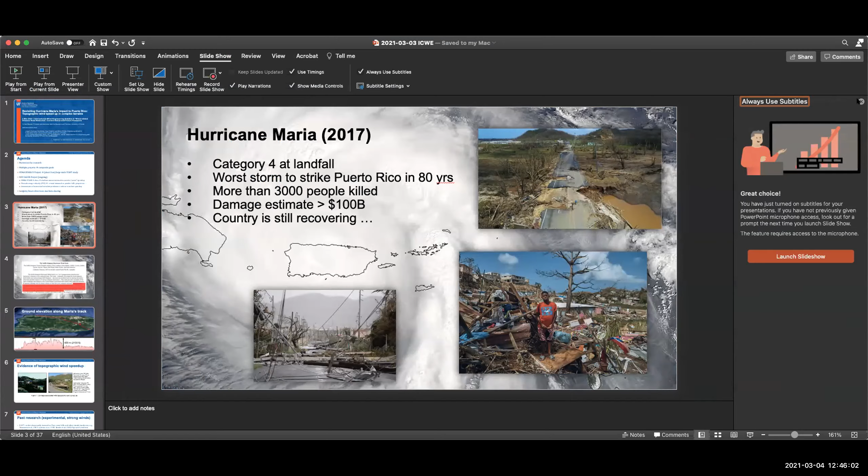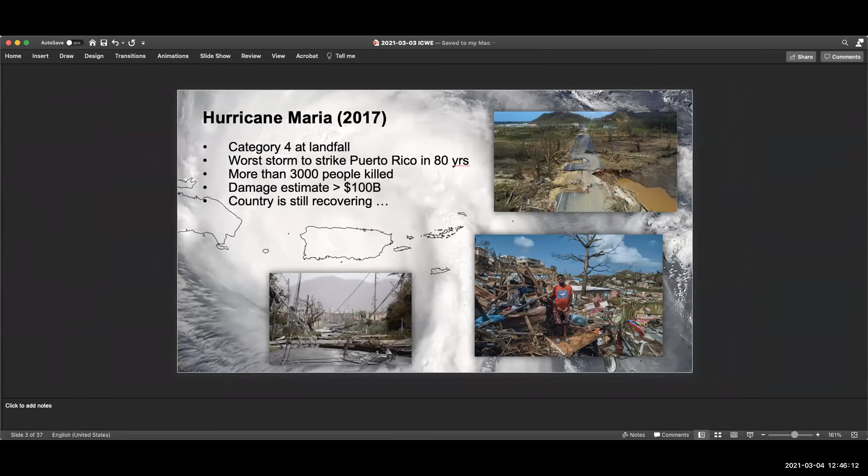The first of the two short presentations is given by Professor Forrest Masters, who's a professor in the Engineering School of Sustainable Infrastructure and Environment, and serves as Associate Dean for Research and Facilities in the College of Engineering. He gained his PhD in Civil Engineering, Structural Engineering from the University of Florida in 2004, and has received support from more than 50 grants from state, federal and private sources, including the NSF Career and MRI programs. He leads one of seven natural hazards engineering research infrastructure facilities for the NSF to study the damaging effects of extreme winds on civil infrastructure. He's published more than 100 papers in peer-reviewed journals and conference proceedings, and has given more than 100 invited presentations. He serves on the board of the Federal Alliance for Safe Homes and recently served on the NIST National Advisory Committee on Windstorm Impact Reduction. In 2014, Dr. Masters was awarded the Junior International Association of Wind Engineering Award, the highest award in his field recognizing significant and original contributions to research by an individual under the age of 40. He was also honored with the Outstanding Achievement Award in Mitigation at the National Hurricane Conference.

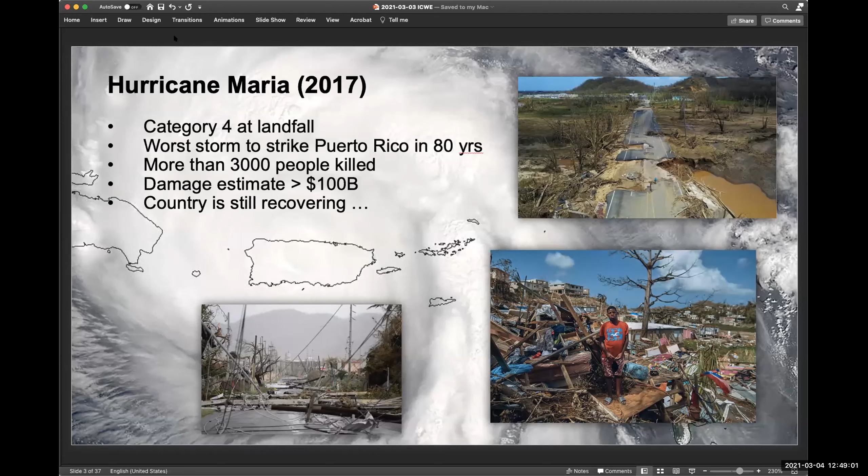With regards to Hurricane Maria, it was truly catastrophic—a Category 4 storm at landfall. It was the worst storm in 80 years for the country. Over 3,000 people were killed directly from the event, but subsequent studies have shown a lot more people died because of indirect causes. Damage estimates were over 100 billion, and truly the country is still recovering. It was an absolute tragedy.

Puerto Rico is located basically at the boundary of two tectonic plates, and you have a pretty large region of mountains that runs through the middle of the island. So it makes for some interesting terrain.

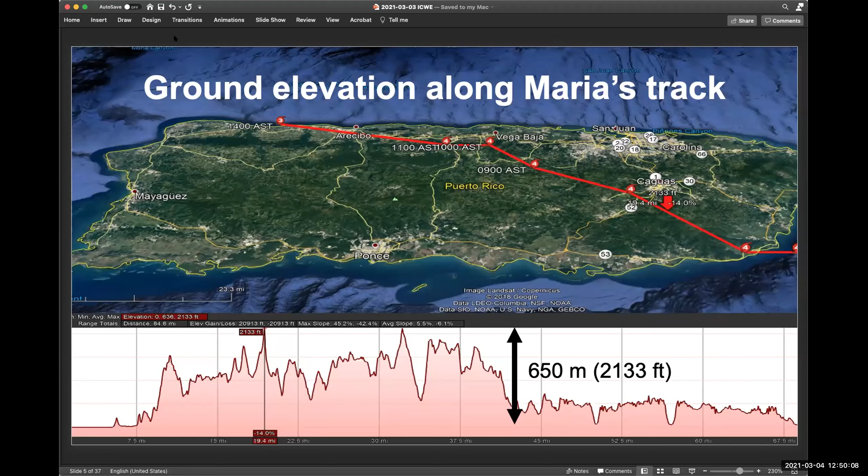We know that wind speed-ups can reach a value of 2, looking at flow upwind of the transition up the slope to the top of the hill or the mountain.

Well, what's really interesting is if you look at this literature, which has been going on for decades. There have been high quality projects occurring since the 40s and 50s even on this, but a lot of them focused on simple landforms. Probably many of you are familiar with the Askervein project and others that have taken place over the years.

I'm not going to get into field experimentation today, but in addition to the experimental work done in the laboratory, quite a few projects, even some done recently in Portugal and other places, go in and quantify the fluxes and surface behavior, looking at canopy flows, kind of the whole 9 yards, and that's informed our understanding of modeling.

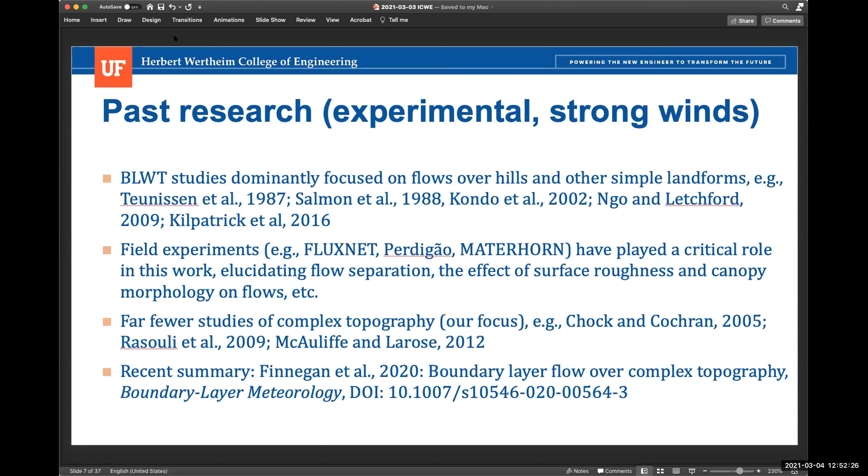So as a result, when the FEMA mitigation assessment teams finished up and produced their conclusions, it was determined there needed to be a special wind map generated for Puerto Rico, a special wind region map, just like what had been done following Iniki in Hawaii in that area. This is sometimes referred to as microzonation, but basically a special wind map.

So rather than looking up, say, Kzt in ASCE 7, you can work directly off the map to pull wind speeds. FEMA and its contractors, through a program called STARR II, which involves a couple different engineering firms including Atkins, worked with Applied Research Associates with Peter Vickery to develop that map.

And they came to us and asked us to do a project to collect data to validate the modeling, semi-empirical modeling that Peter was doing. And so we got involved.

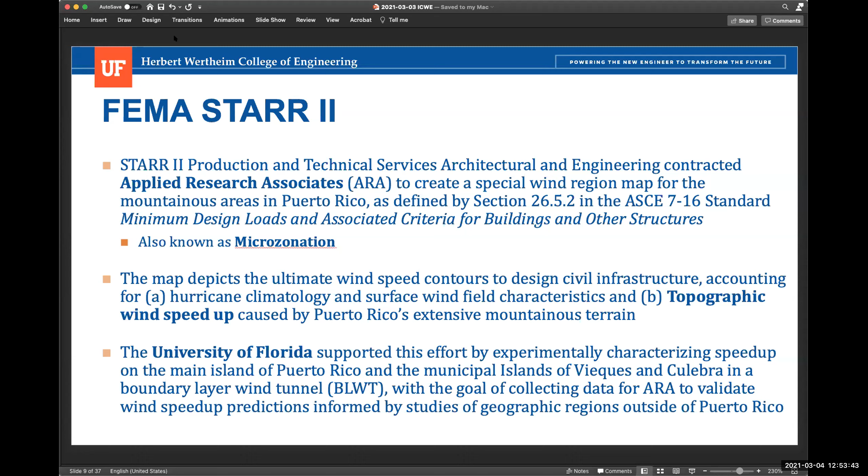It was an interesting project because we didn't have a lot of time. We were not equipped in our lab to do any type of topography work. I think they got a hold of us in May and we had to start by June. We only had, I think, 3 months to do the whole project. As you'll see, it turned out to be, I think, one of the largest topographic studies ever completed.

The project centered on 6 study regions on the main island, basically at the landfall point in the areas, Yabucoa and Humacao regions, and then also inland, very built up areas there in the mountain chains in Utuado and Aibonito, and then also the 2 municipal islands, Culebra and Vieques. So we picked those regions to work in to get some type of representative sampling of the area.

The island's simply too large to put in the wind tunnel. So we ended up working with a 1 to 3,100 scale, which is nominally the size you need to encompass most of Culebra. That's nominally a 12.2 kilometer diameter and a projected state plane coordinate system.

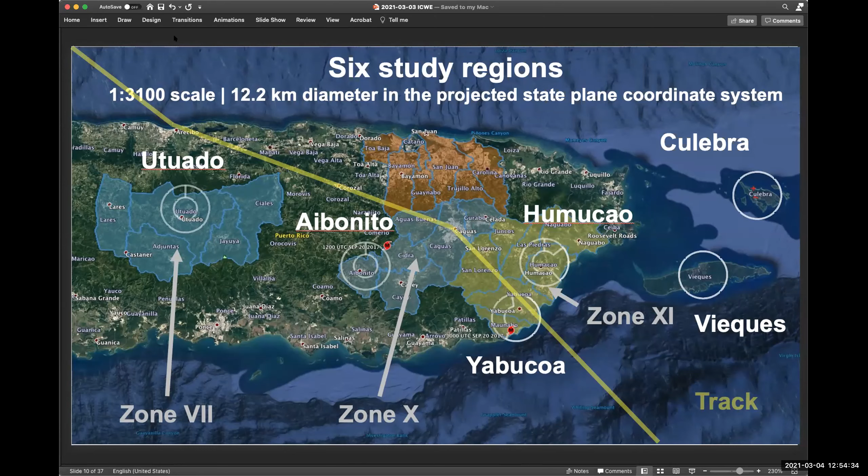So as I mentioned before, this is real terrain, real environment. It looks something like this. Here we're looking inland, I think at Aibonito or maybe Utuado. But you can see our measurement cruciforms where we plan to do data collection, and you can see all the different locations, which in plan form are spread equally, but when you look at it obliquely like this, it does look a little bit funny.

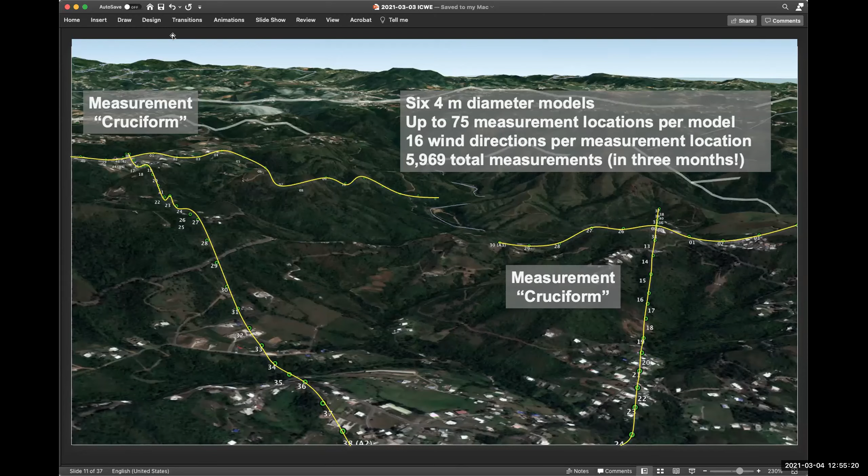So we developed 6 4-meter diameter models. We took up to 75 measurement locations per model and looked at 16 different wind directions at each location. So we took almost 6,000 measurements during the course of this experiment using Cobra probes.

So if you're not familiar with our lab, let me introduce you and I'll walk you a little bit about the experimental setup. This is our facility.

We're located at the Powell Laboratory at the East Campus of the University of Florida. We don't really view our lab as just a physical testing lab. We do a lot of work on the high performance computing system there. It's really a cyber physical testing facility. In fact, that's very important for this project. It's really the linking of these two things that makes the operation work.

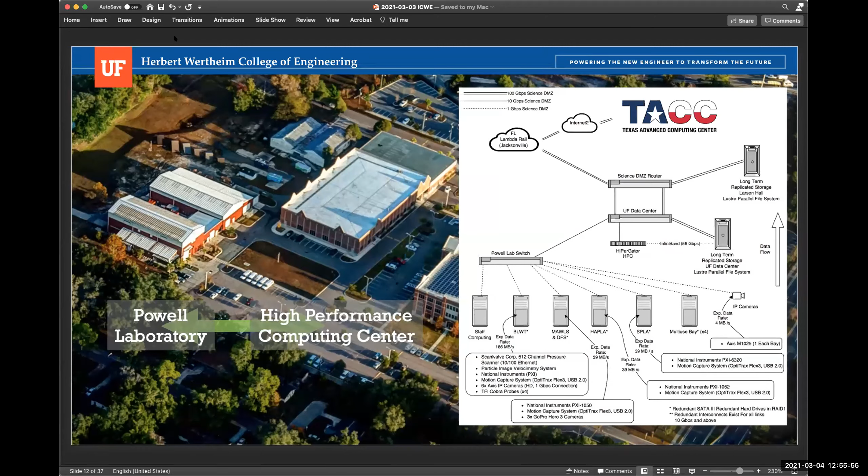We're really just one program, at least in the US, one of many, and I want to tip the hat to those other programs. We work inside a larger program managed by the National Science Foundation, a large facilities program. If you've heard of the Large Hadron Collider, the McMurdo Station in Antarctica, the LIGO facilities that detected gravitational waves, or more recently the Arecibo telescope, which unfortunately was destroyed but is now being rebuilt, it's this program, called the Natural Hazards Engineering Research Infrastructure Program, that's sponsored through this effort.

It's actually a broad collection of different programs. There's a good chance, if you know an academic here, or even practitioners in the US who practice or do research on wind engineering, that they're part of this network in some way. There's quite a bit of industry involvement too. Just to take a second to acknowledge some of those other groups, including Florida International University, which also operates the Wall of Wind as part of that program.

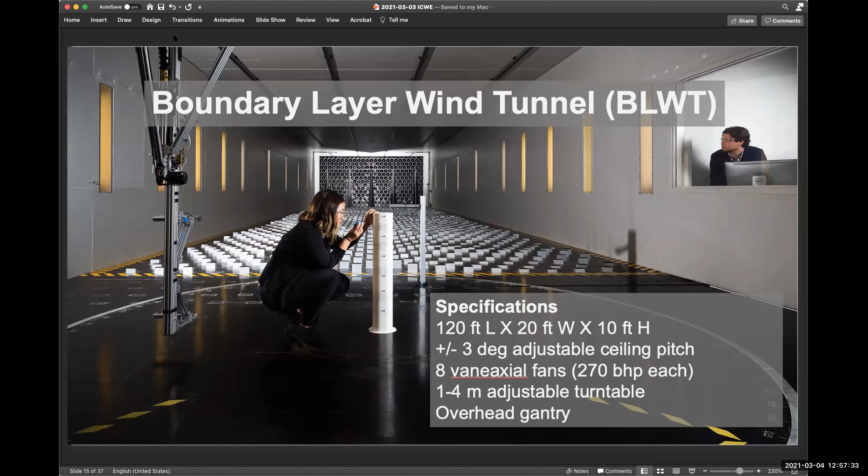Our focus primarily is boundary layer wind tunnel modeling. For those of you who haven't seen our facility, that's a whole presentation unto itself. But we have some unique features with our terraformer system that allows us to individually change elements. We can change the development section out in 90 seconds to any configuration, and it's all been modeled appropriately, so there's no guesswork in terms of choosing a roughness length and a geometric scale. We can directly dial that up, so we get to do lots of high throughput testing in a large tunnel.

I want to immediately point out, as someone who had not done topographic work before, I discovered very quickly I had way more questions, and still have some, about how we do that, and maybe even question whether this is really the future of how we're going to do this type of modeling. One of the biggest challenges is working at these incredibly reduced geometric scales. We went to 1 to 3,100, which was under the limit in the relevant standards and literature of 1 to 5,000.

But if you look at our Reynolds numbers, we had a rough wall boundary layer, as expected. At the end of the day, the mismatch is a factor of 7,000. It's a huge difference between full scale and model scale.

Secondly, because you work at these small scales, when you're trying to take measurements down at the Earth's surface, you're not really measuring in the inertial sublayer or roughness sublayer anymore. You're actually getting into the eddy surface layer. That doesn't really change the mean velocity profile, but it does have an effect on the spectra. As you can see here, the roll off is different. You don't get a 5/3 roll off like you normally would. So that was one thing we discovered.

Working with probes is just a nightmare, to put it in a word. The types of accuracy you have to achieve to do this is incredibly hard. We have a very large turntable, and we're trying to position the probe within a millimeter, but also getting it close to the surface is a challenge. We can only get down to about 8 millimeters before we distort the flow. And there are real consequences—it's easy to break a $10,000 probe moving around—but we did it.

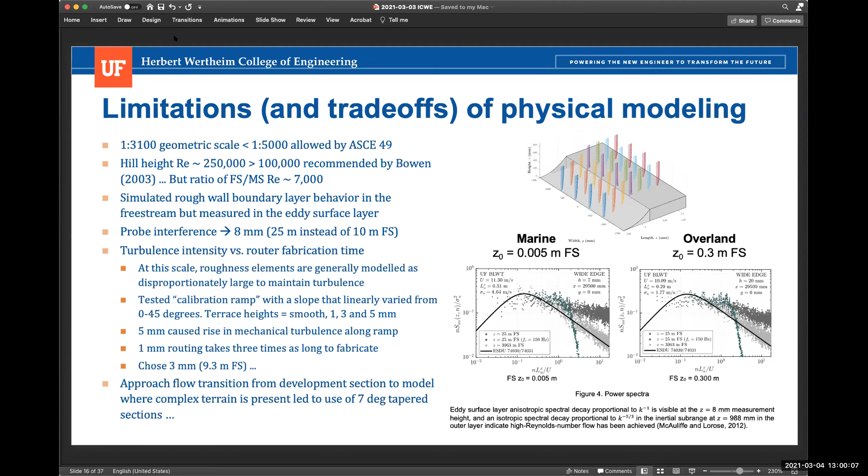We also used 2 different approach flow conditions. Regarding the transitions, one of the things we discovered was particularly in places like Puerto Rico and these inland areas like Utuado and Aibonito, you know, how do you deal with having significant topography at the edges of the model?

So we ended up using a tapered type of configuration where we basically introduced a taper, shown here at 7 degrees, which is generally accepted to avoid any kind of boundary layer separation or odd behavior at that increment. So we had these big models, but in the end we only sampled really in the interior region, so there was plenty of time for the internal boundary layer to build up as it traveled over the region.

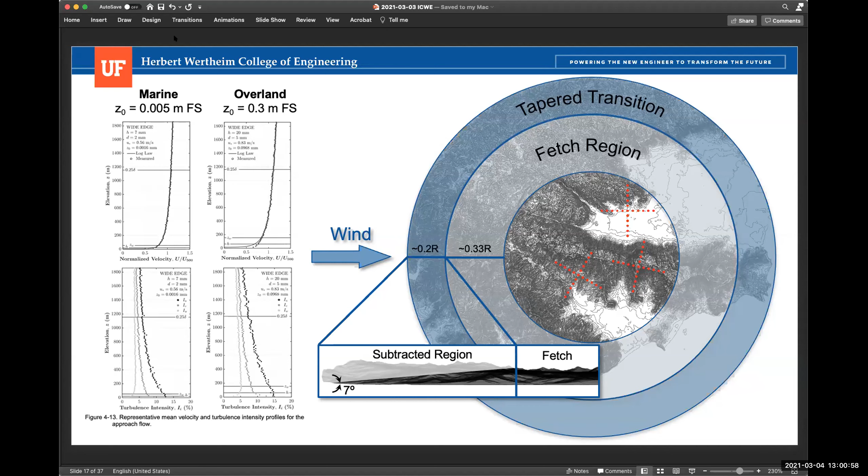That being said, we also kept the approach flows dialed in for that particular area. So we used a marine and an overland condition, where the overland really represented more of the treed type condition. You can see the mean velocity profiles and turbulence intensity profiles there.

It was quite an operation building these models. It took 150 hours to go from the DEM to the instructions for the 3D router. But then we put them together, and there you can see the instrument gantry on the right.

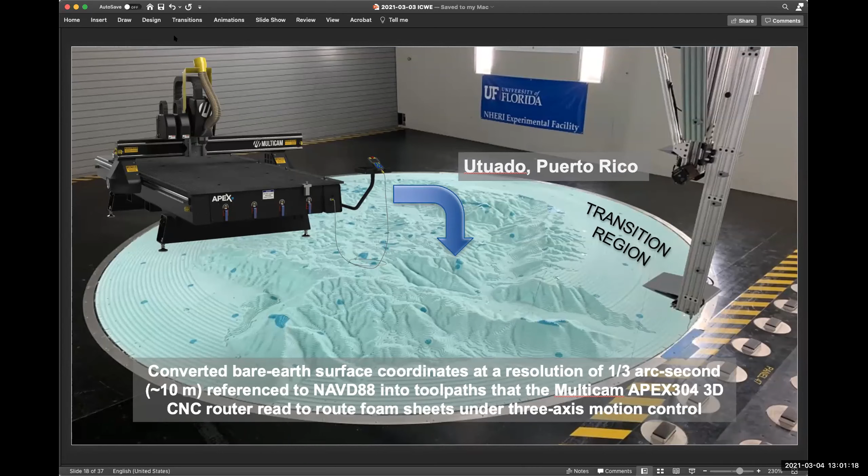This is all roboticized. So we built this system—basically everything you've seen we built ourselves—to actually move the probe around to do this quickly. So for us, it was really one of our first big major ventures into doing high throughput experimentation in a wind tunnel.

Because again, 6,000 measurements over 6 models, it was quite a bit of work. And so we did this. You basically had a sequence, the probe would move around, take measurements, and then we would have to manually adjust the model and do that for 16 different wind directions.

So some of the outcomes of that work: we finished on time. A lot of overtime was spent doing that, but we got the data to ARA. They were able to use it. Peter's modeling did get accepted by the Puerto Rican Building Code, and then also ATC adopted it in its Hazards by Location tool. My understanding is it's currently under consideration for ASCE 7-22—maybe that's passed by now—but we also have a wealth of data.

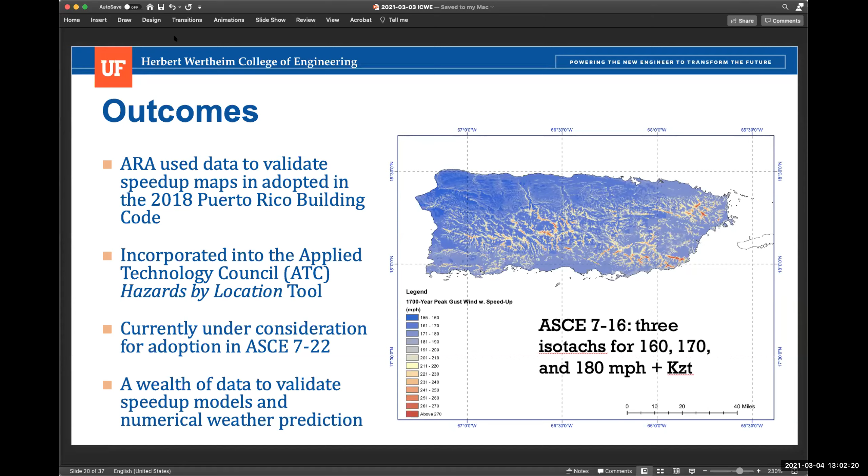So the issue we ran into at that point is that project was really an applied project, it wasn't a basic science project. So I went to my program officer at NSF and we got some funding to work on this problem. And that's where we began applying machine learning and multi-scale atmospheric simulations.

I just point out, this is a high risk, high reward project. NSF funds these programs to basically go out and collect preliminary data, try things that would be really hard to get someone to fund you to do through a regular funding channel. But it opened up the opportunity for us to do PIV measurements.

So where we're really headed with this work and this stage of the work is we're trying to move away from these probe measurements to getting full, stereoscopic PIV. We already moved past the isolated landforms into the complex topography, but really doing this over a large number of terrain sets. That hopefully will help us do the validation for these semi-empirical methods for CFD, numeric weather prediction, and also training machine learning models.

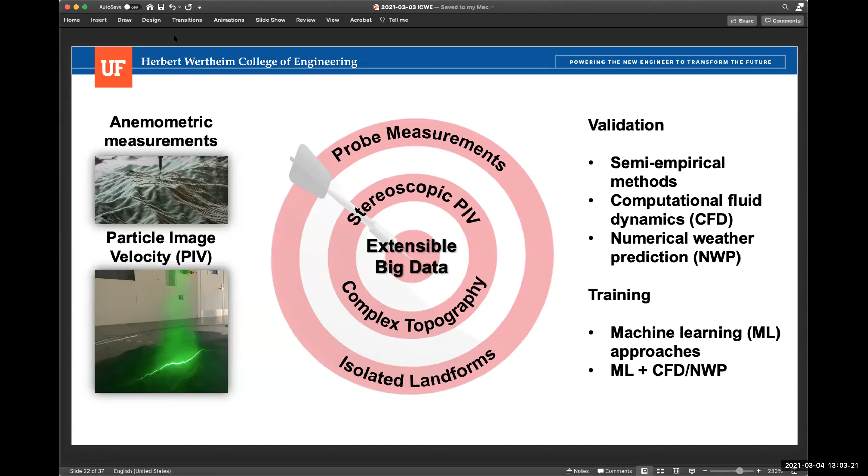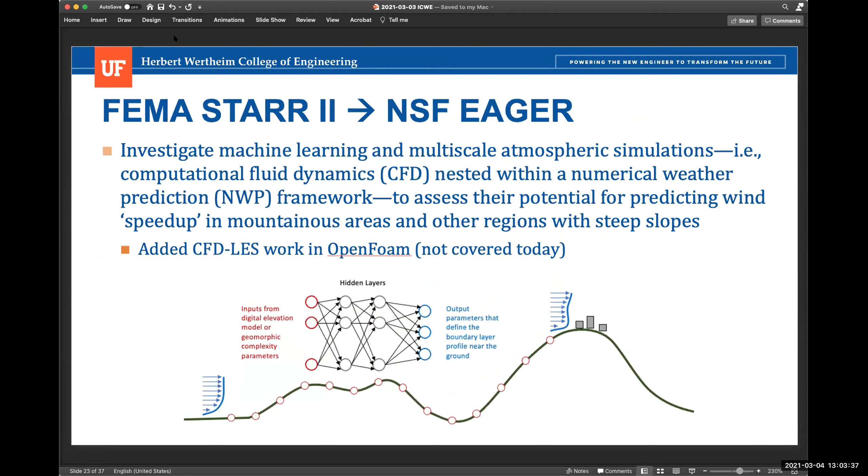And we're doing a lot of that ourselves, which I'll just touch on. So a big focus of the project really is taking the topographic information as inputs to the machine learning model, and then predicting the profile outputs, which is exactly as I've shown here, as well as the numerical weather prediction that Luis is working on.

But I have to say my favorite part of this project actually was the fact that this is truly a Puerto Rican project, okay? So the project team is myself, Luis, who's a professor at UPRM, but we also brought in 2 REUs from UPRM, as well as a student from there, Jorge, who's working on the program, and then another REU from Bucknell who had family there. But everybody except for myself and the guy on the right was actually in the storm and experienced it firsthand. So it really meant a lot to them to work on this project.

I have to speed up here, everyone's run out of time, but just some early observations on where this is going: the machine learning prediction is working exceptionally well. Using even shallow networks and training that to the Cobra probe data—we had to do that actually last year first, because of the pandemic the lab was shut down—it's worked incredibly well. We're seeing that we can do this quickly.

This is just an output here of Humacao, that region, looking at maximum speed up values predicted using machine learning. The whole training on the whole data set, all 5,000 points, and doing this takes about 5 minutes on the laptop that I'm talking to you on now. So we feel really good about applying this at country scale or even larger.

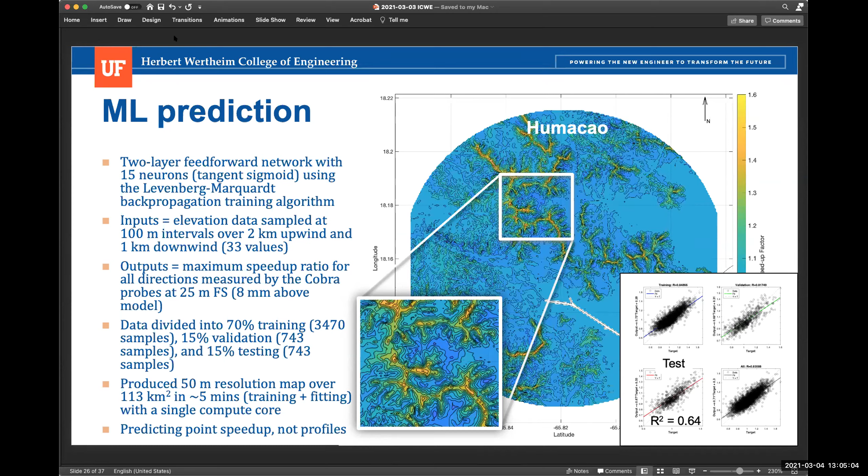One issue though is we're predicting point speed up, not profiles. And so that's where the PIV system comes in. We've now got the system set up and automated to do PIV data collection.

I won't get into all the details, but one of the things I'm super proud of our team about is they worked so hard to decrease the workflow time. Now we're able to do this every 5 minutes. We can do a 15-second scan and get the data up and keep moving. That's light speed at PIV timescales for data collection.

But that's the setup, so you can see the 2 cameras. We did have to put 10 seeders upwind to really promote good mixing for that to work well.

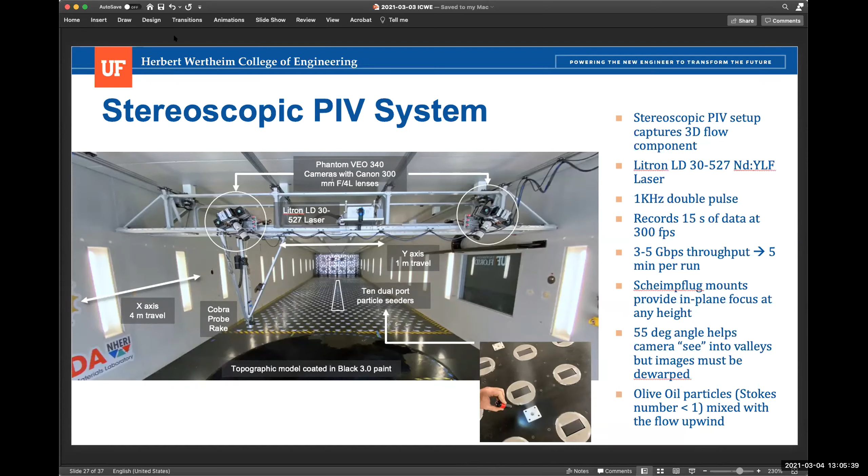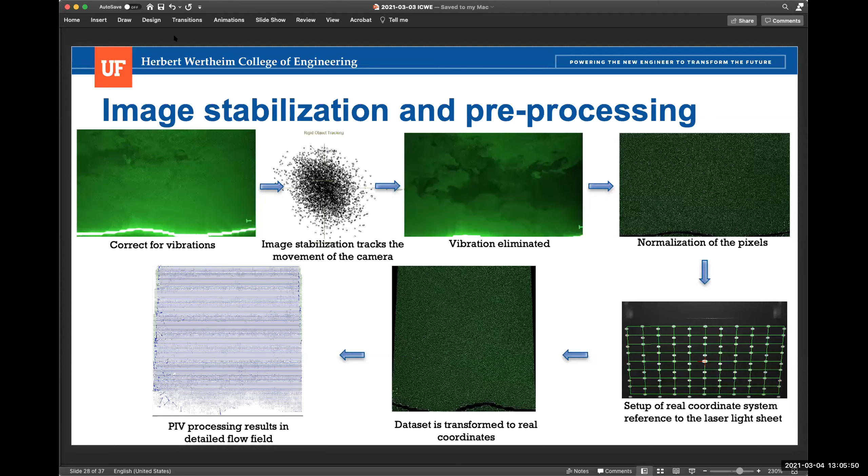We have to do a lot of post-processing on the data, more than you normally do, even particularly in a closed circuit tunnel. We're in an open circuit tunnel, with 8 fans, a lot more vibration. So there's quite a bit done on the image stabilization and pre-processing side, as well as stitching these together.

And so this work is still ongoing. In fact, I just got some of the first data last night. Here's a snapshot of some of the longitudinal mean velocity profiles over Culebra.

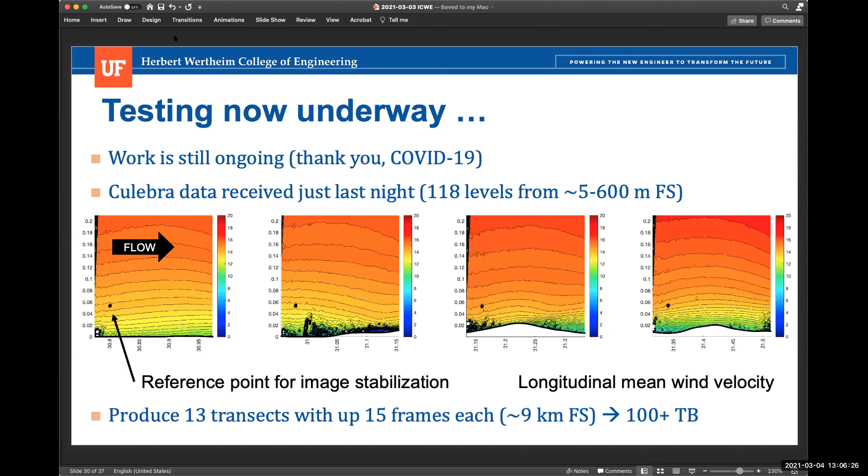This is our smallest area of the bunch. But the goal is to produce about 13 of these transects, with some of them having as many as 15 frames, or roughly 9 kilometers. Massive amount of data, 100 plus terabytes will be generated off of this, which we can use for machine learning.

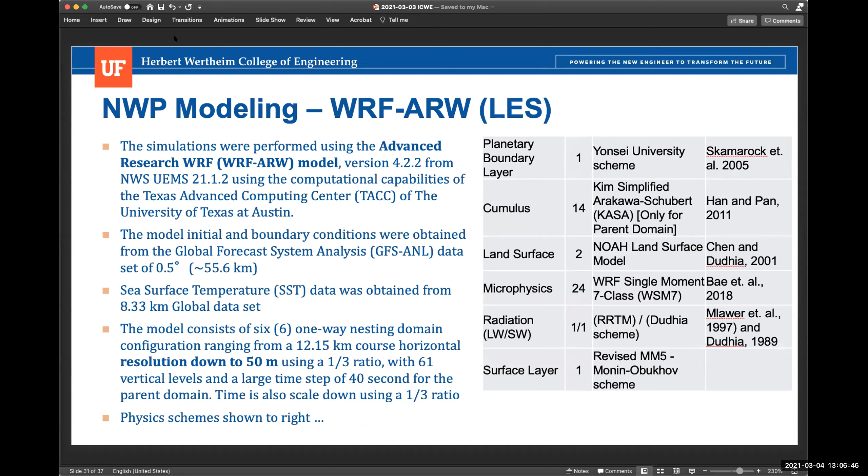Also, concurrently, Luis is working on the numerical weather prediction side. He's using a version of WRF, the advanced research model. He spent a ton of time working on this, getting it down now to 50-meter grid scales. And you can see the model here running.

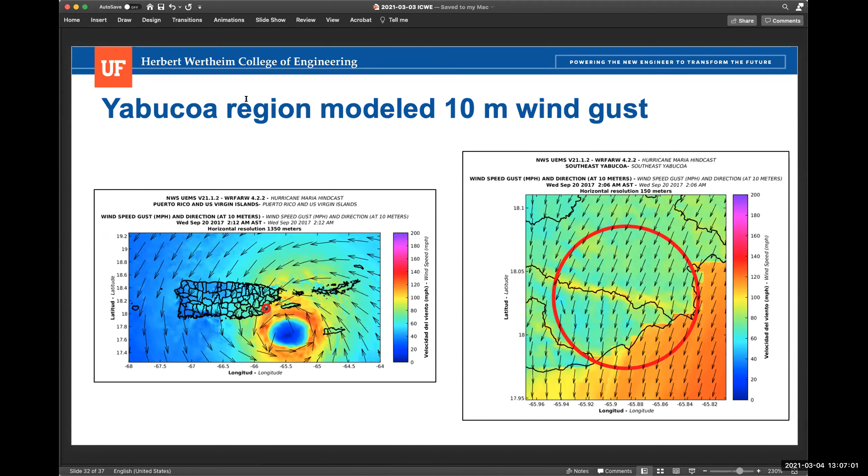In the interest of time, I won't get into too much detail here, but you can always turn back to the previous slide and look at it. Now we have a working model, which gives us basically the data we need in order to do direct comparisons. So that's where we're headed with this, using these nested models like you see here.

This is where we can put all the pieces together. We're looking at the Cobra probe measurements, the PIV, the numerical weather prediction modeling, and we're looking at using OpenFOAM as well—I'm not going to talk about that today. So we're trying to put all the pieces together to look at this now, to see what works, what doesn't, and if it doesn't work, why.

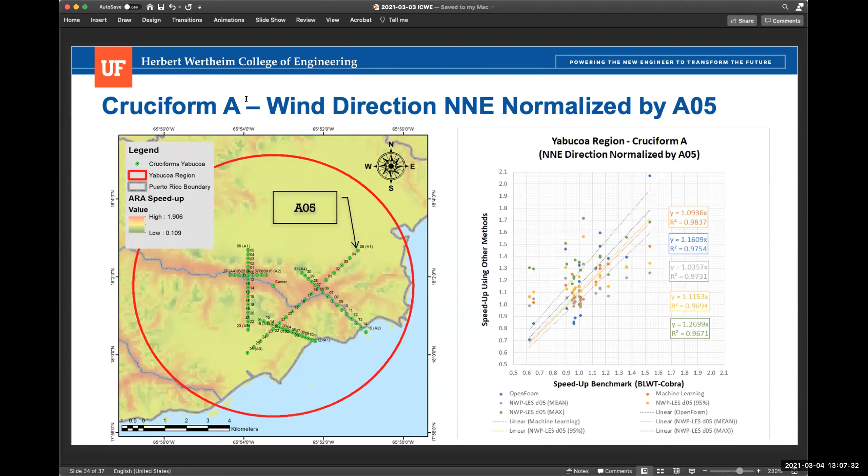So that's just one example for this region. I'm just going to wrap here to stay within time.

Again, this work is ongoing. I gave you a real snapshot of the things happening right now. I do have some real questions about the efficacy of boundary layer wind tunnel modeling—I talked about some of those. The PIV data, I think, is going to be really fascinating; we haven't had that kind of information before. The machine learning approaches really do show early promise. The verdict's out on the NWP for operational use, but I think for research purposes it'll work fine.

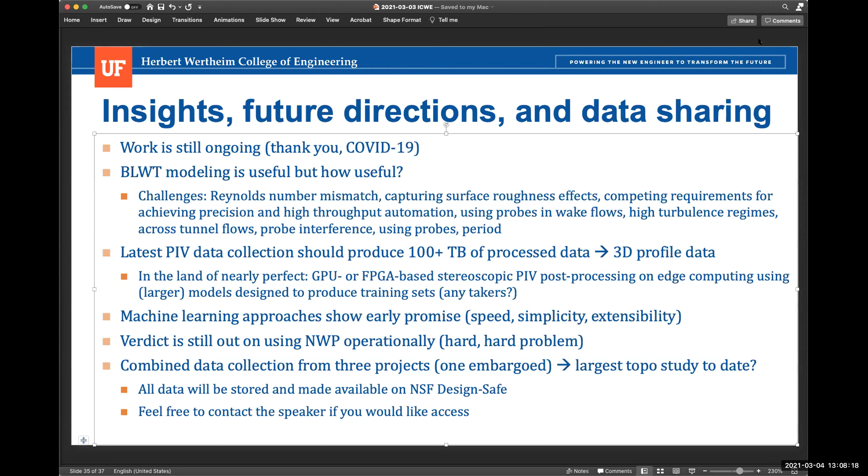Thank you very much indeed, Forrest. Yeah, I certainly got things I'd like to say on that afterwards.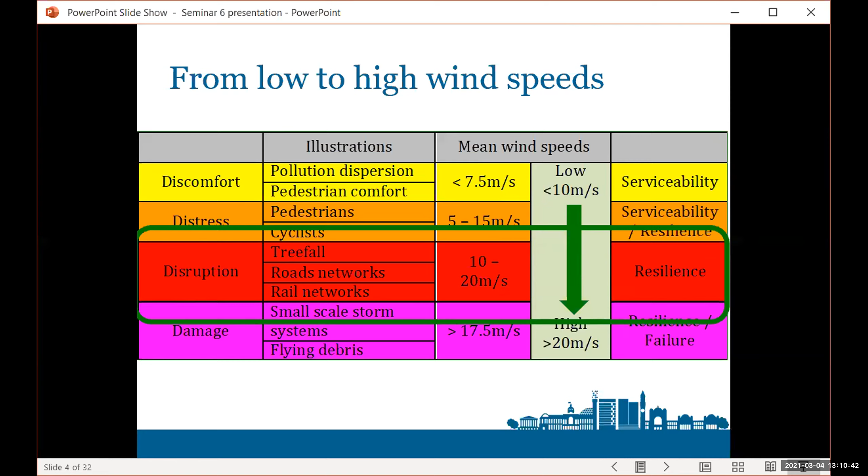To define where we're at, most of the work in wind engineering tends to go at the high wind speed level, and this is what Professor Tamura talked about, looking at resilience, looking at failure, flying debris and so on, maybe 20 meters a second or above. A fair bit's gone on at low wind speeds when it comes to pedestrian comfort, pollution dispersion and the like. By contrast, I'm going to talk about the often unregarded middle wind speeds, which are actually very important for the sort of distributed systems I've looked at in my career, agricultural and transport systems, somewhere in that middle range. Professor Tamura has acknowledged the importance of this.

I'm going to first of all look at road networks, then rail networks, then at agricultural networks.

Road networks are very basic. Major effects, such as here on the Skye Bridge, there are a number of roads. The picture of the Skye Bridge just shows rather nicely the standard method of developing wind speed restrictions, which are to have them staged. So several wind speed levels to close the bridge. And the bridge you can see is in Scotland, where I did some work a few years ago.

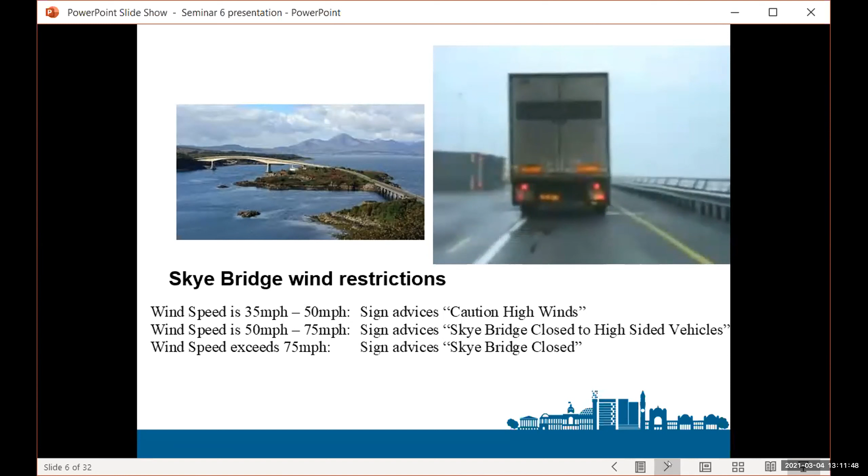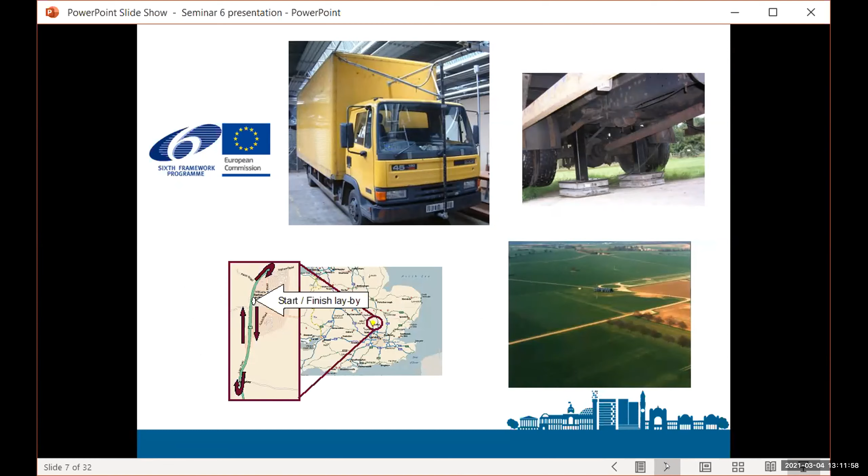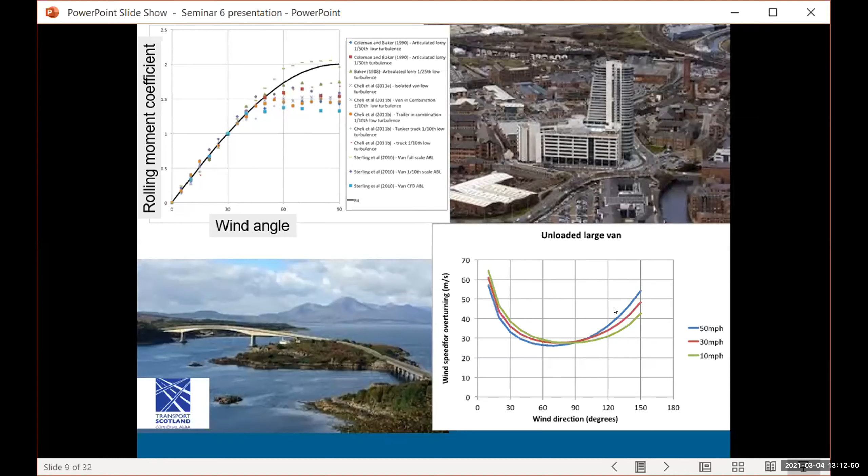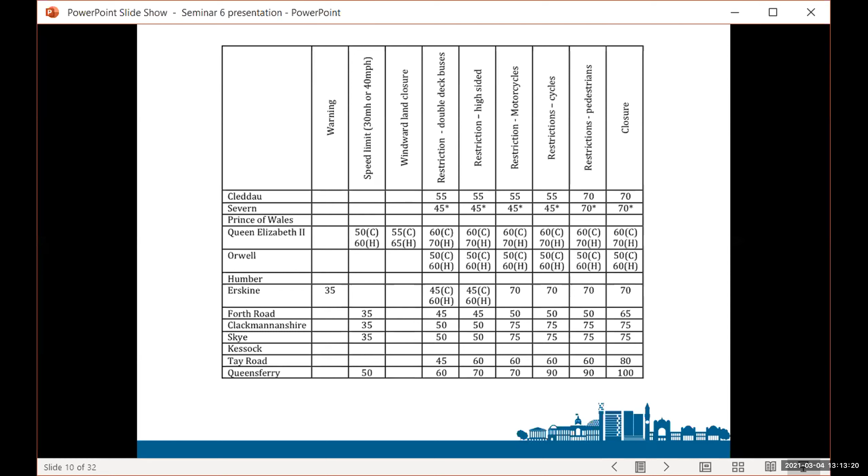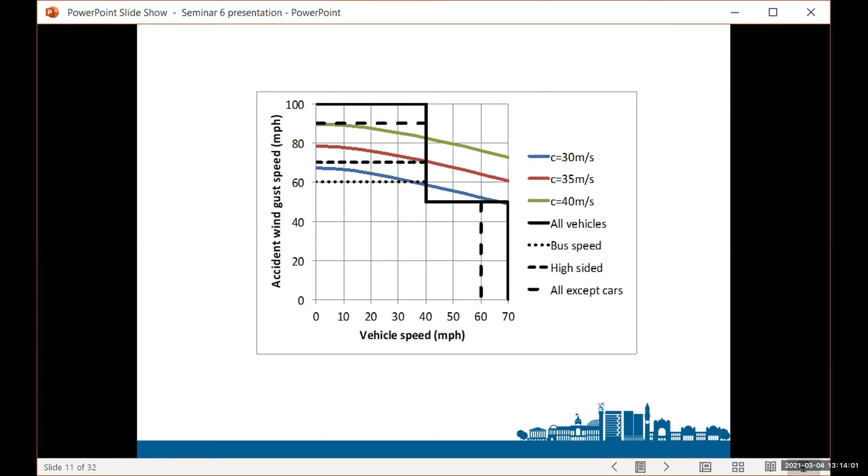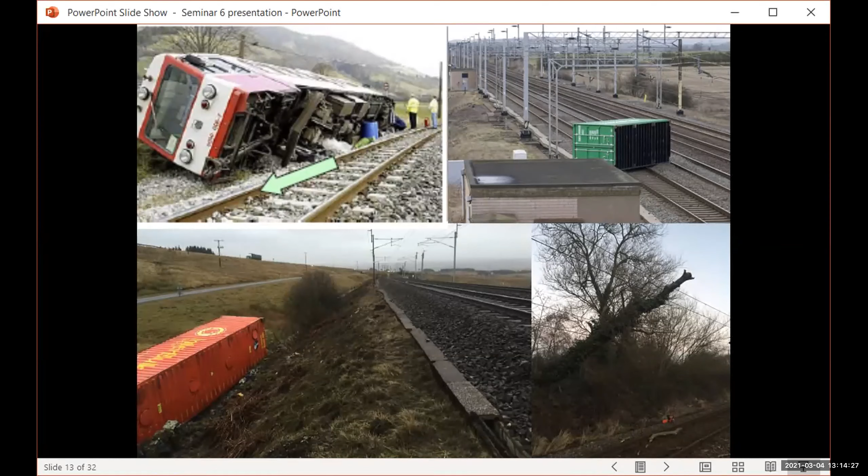Rail networks are both similar and different. Trains do blow over, and containers blow off trains. Trees fall on railway lines, and Professor Tamura showed pictures of bouncy castles flying in the air - that happens a lot on UK railways too, with trampolines landing on railway lines and causing disruption.

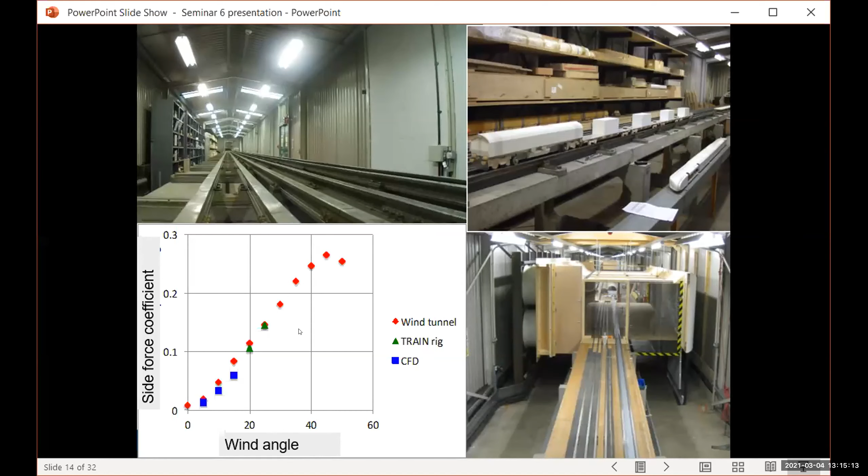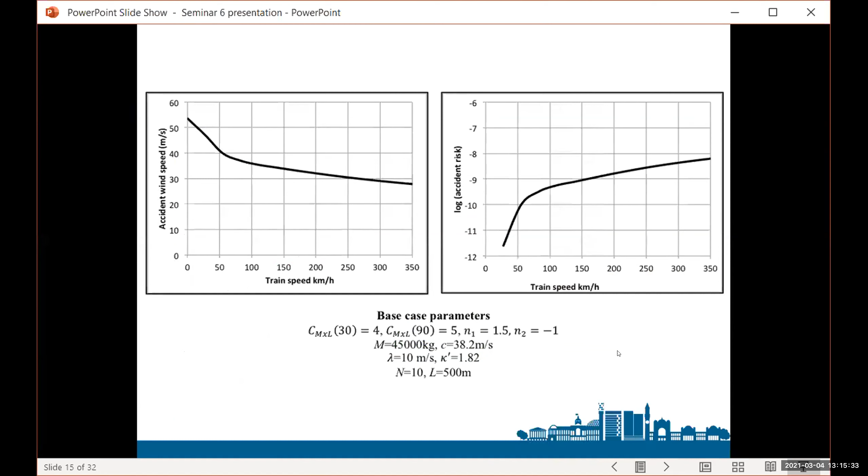Again, we can get curves that show the force coefficients against the wind angle, and we can use those to get what are known in railway terms as crosswind characteristics. So again, a plot of vehicle speed against accident wind speed for different wind directions, or we can plot that in terms of overall risk. Again, wind engineers are fairly happy with that sort of thing, I think.

But it's not quite so simple. When it comes down to operations, you suddenly find you've got all sorts of other things involved, like trampolines landing on the track, like trees blowing onto the track. When you want to impose speed restrictions, you suddenly find that to enable those to be rolled out over the entire network during the course of a day, a decision has to be made about 3 o'clock in the morning to be able to make those wind speed restrictions. So again, wind engineering is simple enough, but trying to match it with these operational criteria is actually far from simple.

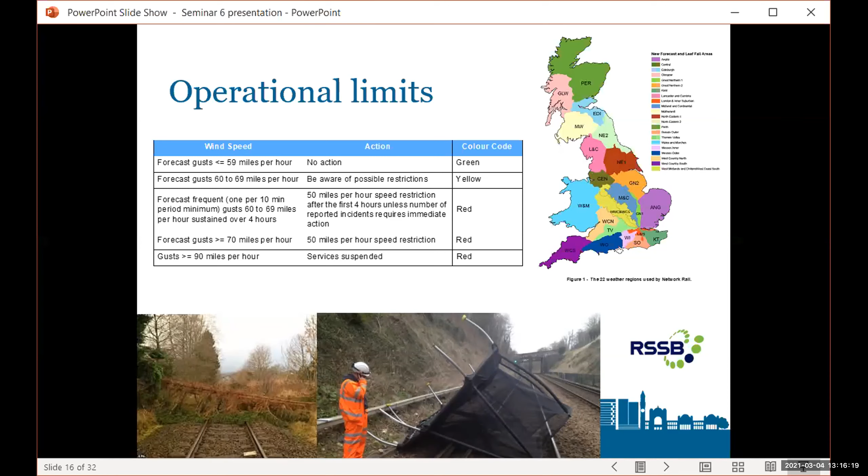I just want to stop this to say what we're looking at here.

What I'm going to show is a picture of a storm moving across Britain, and we'll see an incident occurs somewhere in the middle of Britain. This is actually a flooding incident on the railways, not wind, I'm afraid. And then we'll see lots of dots spreading out from that incident that show the amount of delay, what we call delay minutes, that were measured over the course of the day.

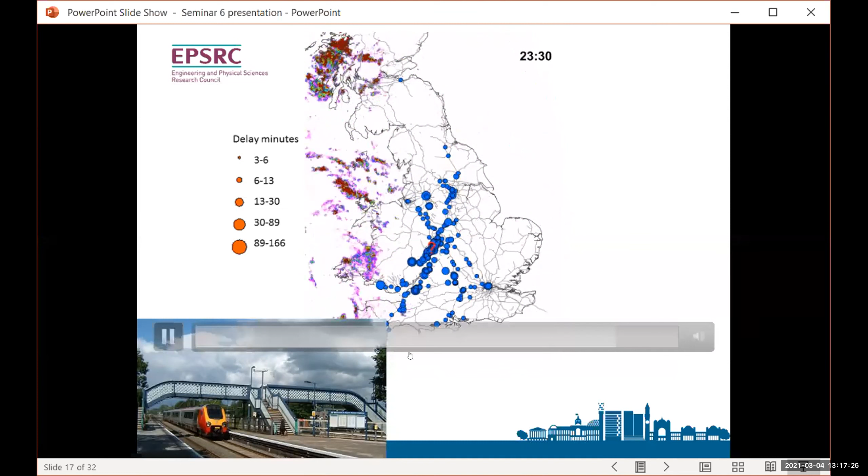And you can see one incident at 11:30 in the morning is still having effects at 8 o'clock at night, 11:30 at night, and it reaches from the south coast up to Edinburgh in Scotland. Local effects can have system-wide significance.

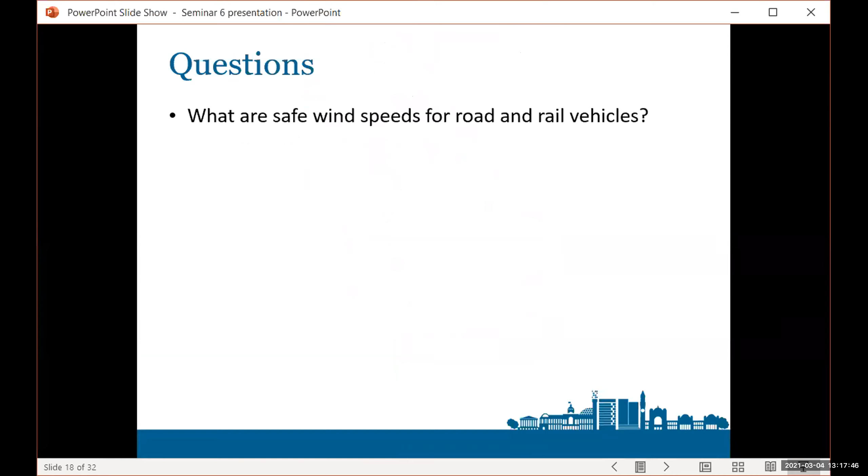So the questions in transport system terms: what are safe wind speeds for road and rail vehicles? Well, we're comfortable with that as wind engineers. We can probably answer that. We've got the tools. But what are the risks of those wind speeds, gust speeds, being exceeded?

And that means we need to do some sort of convolution of mean and gust probability distributions, which you don't often do. How often do these wind speeds occur?

If you close a bridge at a certain average wind speed, how often is that bridge going to be shut during the course of a year? That's a profoundly political point and can have all sorts of societal effects.

How quickly do these dangerous storms develop and subside? What are the resilient operational wind speeds that allow for things like flying trampolines? What are the temporal and spatial extent of these high wind speeds?

These questions in red are questions that wind engineers don't always ask. It's actually quite difficult in some ways to get a handle on them, to be honest.

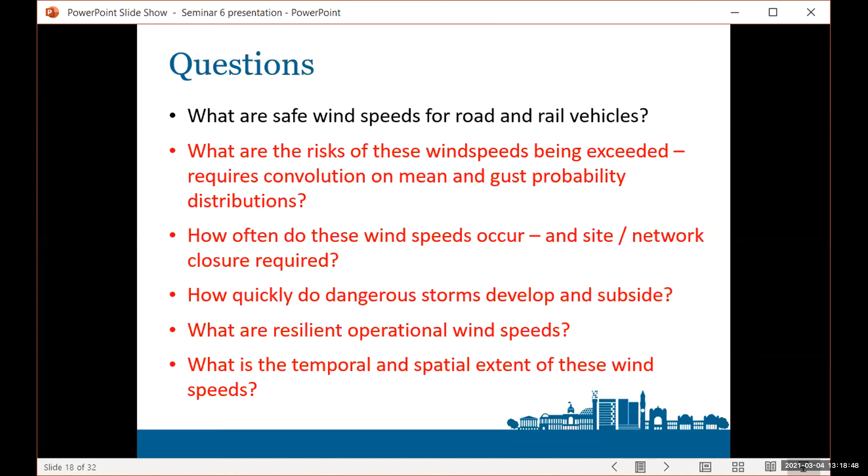Let's look briefly at agricultural systems. This is one of the areas of work that we've been involved in over the years. And the work that we've been looking at is what's known as the lodging of various sorts of crops, flattening of crops due to high winds.

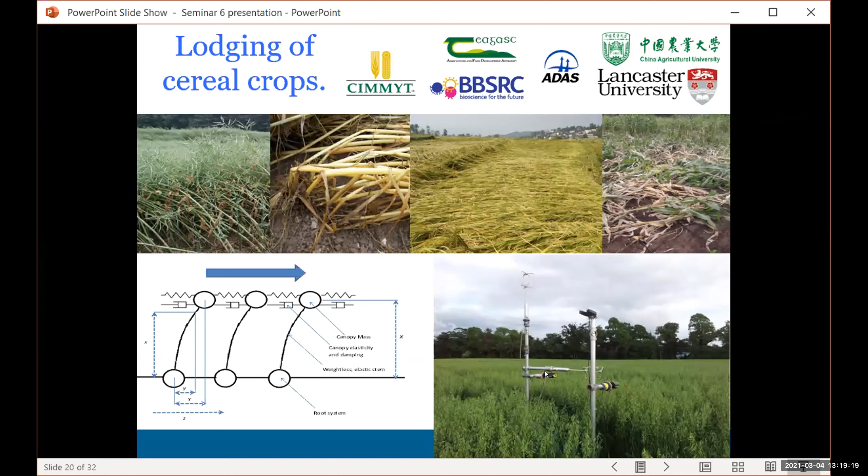And there's work going on in the US on looking at tornadoes in lodging as well. We've developed a mathematical model of the lodging process. We've made various field measurements, looked at the displacement of crops in high winds, and we've managed to come up with fairly simple formulae, I'm not going into this now, that relate the lodging wind speeds to the dynamic parameters of the crops and also to the agronomic parameters, how tall, how big the root is.

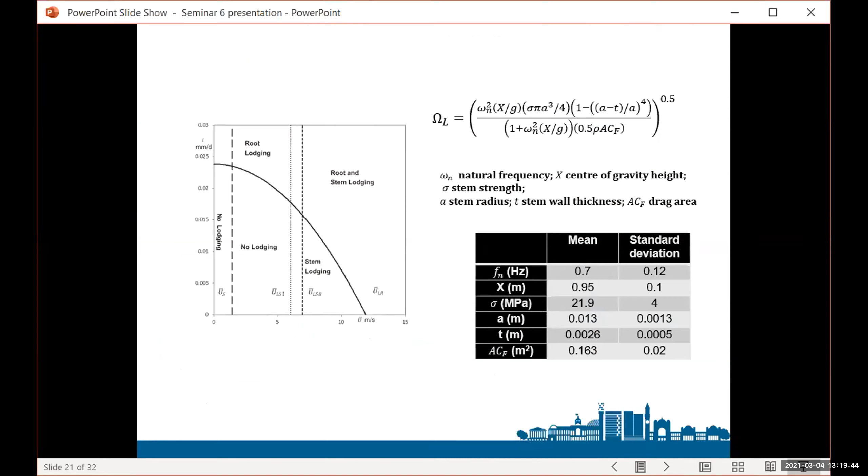And so, again, we can get a handle on the wind speeds that cause these crops to overturn. What are the lodging wind speeds? And that we can actually then use to talk to crop breeders to say, okay, you need to increase the lodging wind speeds by, say, making the root plate bigger or something like that.

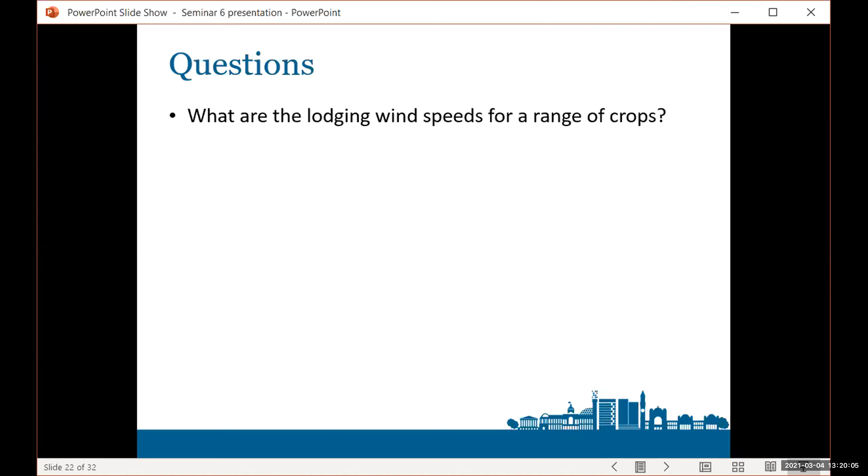Fairly happy with that. But then also questions that wind engineers don't so often answer. What are the risks of those wind speeds being exceeded again? That requires some sort of convolution of mean and gust probability distributions. What is the spatial and temporal extent of those wind speeds?

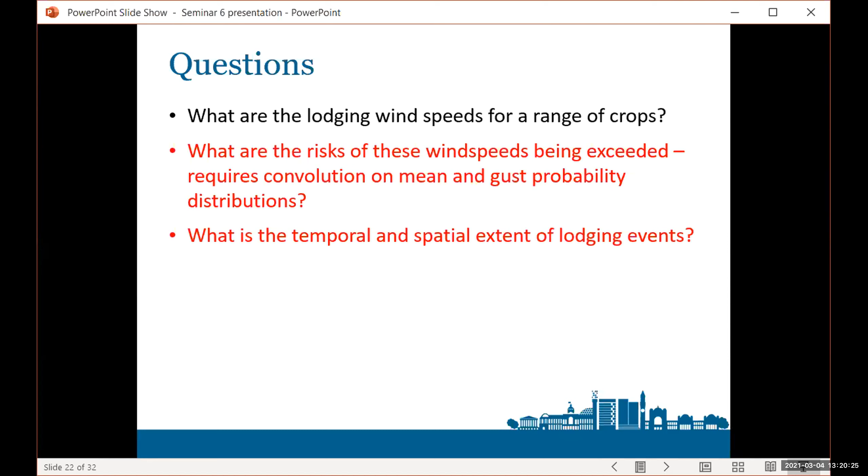So there are some questions. Briefly, very briefly now, what might be the answers to those questions?

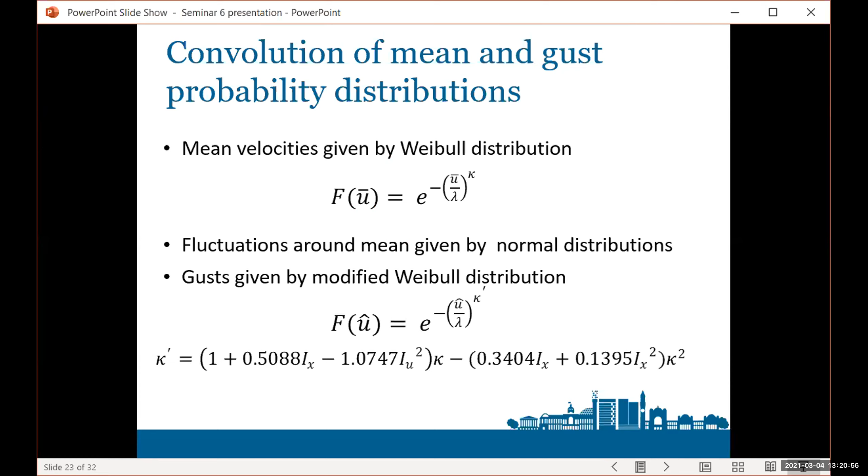Well, you can convolute mean and gust wind probability wind speeds. I don't often see it done, but if we begin with a Weibull distribution, look at fluctuations around a mean, empirically, you can show that the gusts are given by a modified Weibull distribution where the κ parameter is actually a function of the turbulence intensity. It's quite convenient there. So we can do that.

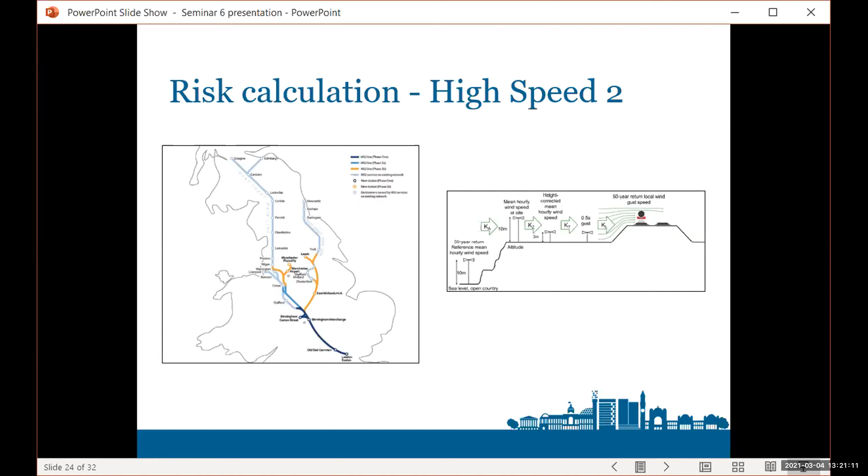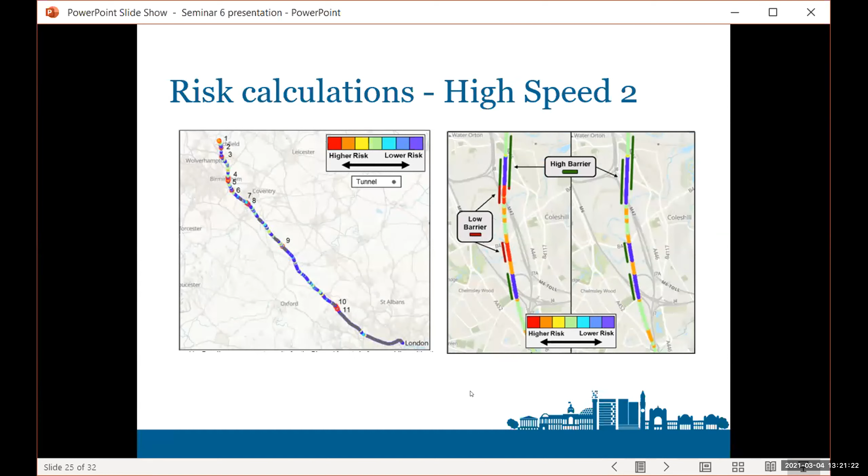And we've used that sort of approach in looking at risk calculations for a new high-speed rail line that's being built in Britain called High Speed 2, from London to the north. And we've done various risk calculations that have identified hotspots along the railway line where we're going to need wind fences. Very much ongoing work at this point.

Then we get on to another question: how often do gust wind speeds of different levels occur for a fixed mean wind speed? Say if we have a control on a bridge where vehicles are stopped if the mean wind speed exceeds 50 miles an hour, how often is a gust wind speed going to be exceeded there?

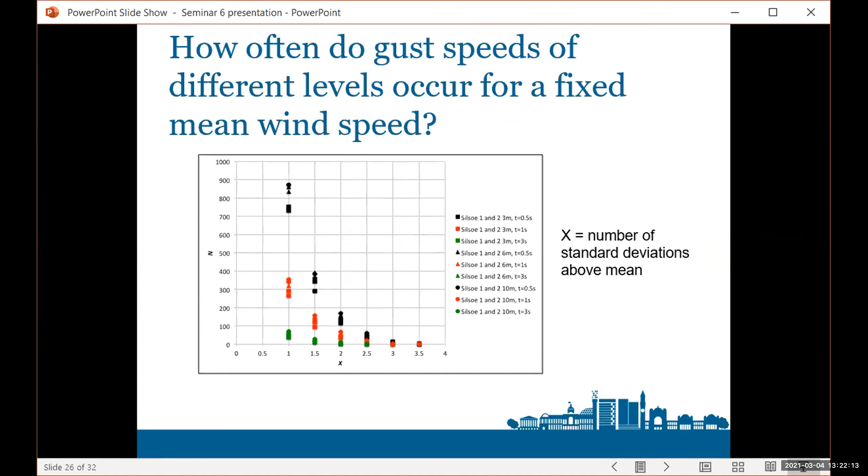Again, it's not a question we've asked very often. It turns things around a little. We've done a bit of work looking at some basic data to try to get a handle on how often the number of standard deviations above a mean is exceeded by 1 second gusts, 3 second gusts, and so on. I can talk to people about that if they're interested.

When it comes to the specification of spatially and temporally varying wind speeds, you can use various methods. There are things in the UK, and around the world, called weather generators that put various climate scenarios in. One downside of these weather generators is they tend to operate over, say, a 10-kilometer or 25-kilometer grid, which is no use if you've got a 100-kilometer motorway and want to know what the weather's doing along there when you haven't got correlated wind.

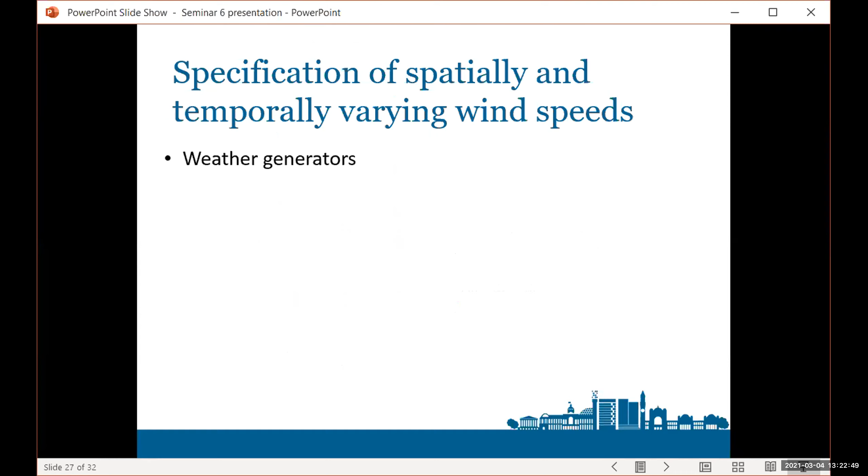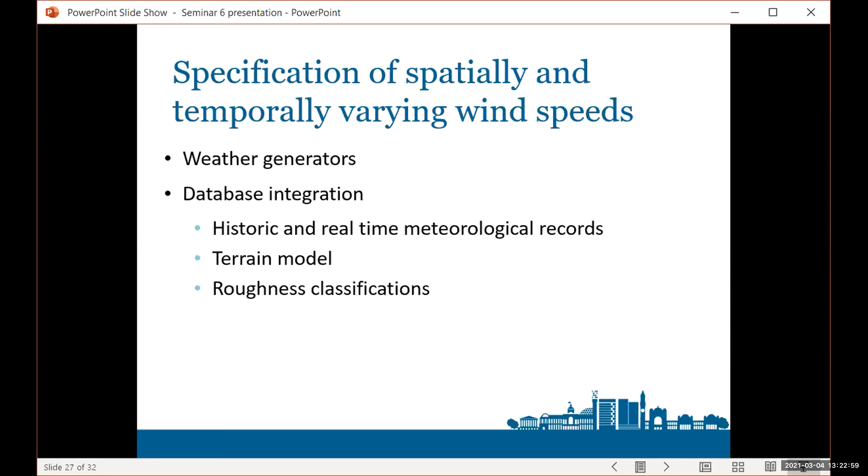We can look at database integration, look at historic and real-time meteorological records, look at terrain models like Forrest has been looking at, and models of roughness classifications. I'll just briefly mention these.

Some colleagues at the University of Birmingham did some work where they looked at treefall on the railway network in a small part of Britain, and identified and correlated positions of treefall with positions of potentially high winds. This is historic data, and we're able to get some handle on where the sensitive sites were.

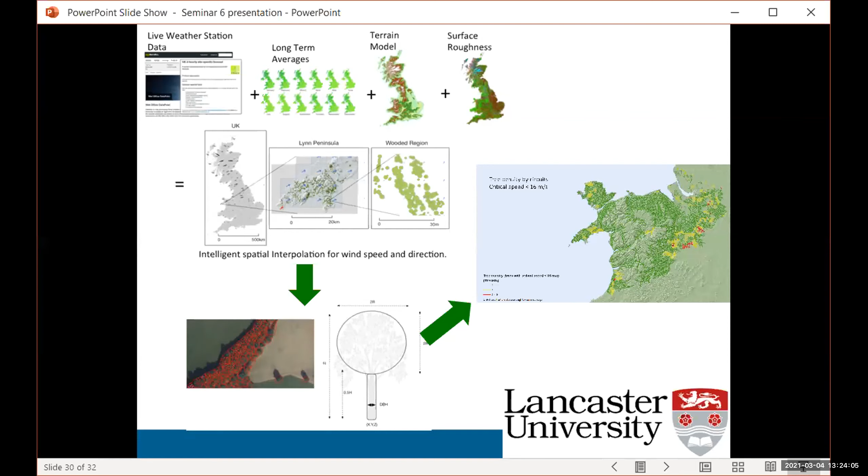Colleagues at another university, the University of Lancaster, developed a model called TREEFALL, tree risk evaluation - what sort of wind speeds are trees in danger of falling at. They put together all sorts of wind speed averages, a terrain model, FlowStar, and surface roughnesses, to provide information on where trees are at risk. That can be used in all sorts of ways, including going and felling trees at sensitive sites. They more recently adapted this to look at crop lodging as well, crop blowing over.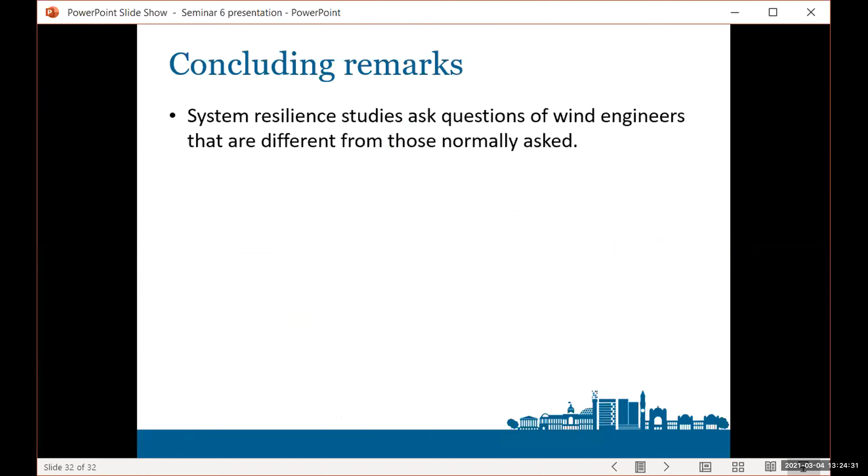So a very quick round through, but some concluding remarks. The resilience of transport and agricultural systems forces us to ask questions of wind engineers that are different from those we normally ask: how often are gust wind speeds at a certain level exceeded, given a particular mean wind speed, for example? What is the spatial or temporal extent of windstorms? A particular windstorm - what does it look like, how big is it? And that's important for long, thin systems.

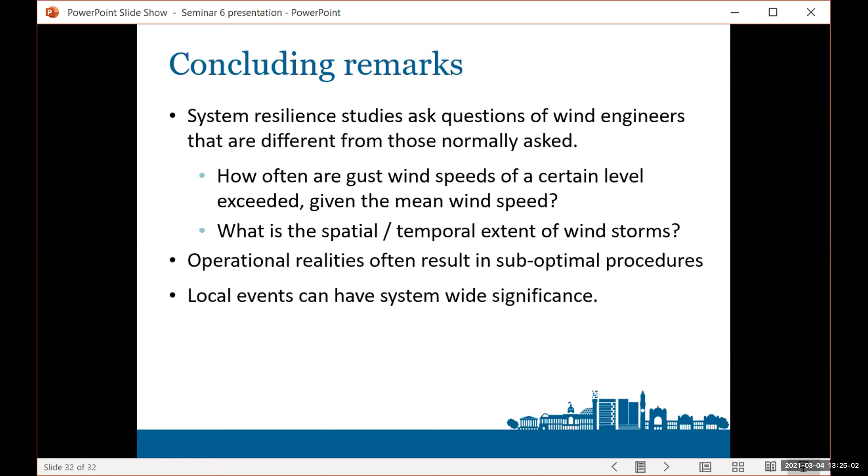Operational realities, whether we like it or not, often result in suboptimal procedures, and local events can have system-wide significance. So I'm going to end it there, folks. I think I've had my share of time. And if I could ask Professor Kopp to show himself and guide us through the questions - as my colleagues ask questions, if they could put themselves on video so people can see them. Thank you very much indeed.

Well, thank you, Chris, and thank you also from the larger wind engineering community for organizing these lecture series for us. I know I've personally enjoyed them, even though they're often very early in the morning for me in Canada. It's a great way to start the day and to see familiar faces and talk about the topics that we love.

When I first saw the schedule for this one with 3 very different talks, I was kind of confused - I thought, wow, those are 3 very different talks. But I think the common theme I was seeing is that as a discipline, we need to start asking some different questions if we're going to mitigate disasters and reduce losses. There are some really interesting problems coming out and interesting questions that can be raised. We won't be able to get to all the questions today, and the panelists will provide responses that will go out later with the seminar links that Professor Baker will send.

The first question is for Professor Tamura, and I'll also ask the other panelists to weigh in if they want to, following his response. It started with the point about temporary structures and the problem of design life and design load levels, and the costs associated with this. You can see this also with tornadoes, for example, where the probability of an individual structure being hit is small, but communities get hit every year. So you have this challenge of designing for mitigation of losses versus the individual structure, which individual owners have to pay for. The question for Professor Tamura is: how might you pay or persuade owners to do this? How might you persuade code committees to change design practice for that kind of thing?